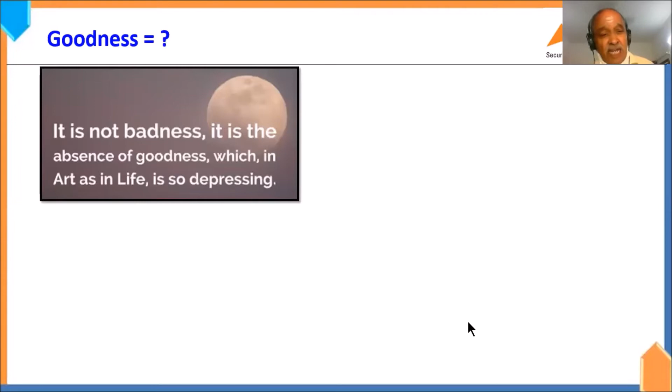Now, still we are on the topic of goodness. It is not badness, it is the absence of goodness, which in art as in life is so depressing. Now, we will define goodness in very simple terms as absence of badness, so that it is easy for us.

So health is, we said, physical health, mental health, emotional health, social health, environmental health, and spiritual health. So health, we can say as a parallel, absence of disease or illness. It's a very simple definition to follow this capsule.

Now, we say spotlessly clean. So spot is a negative thing. So the white shirt that he is wearing is spotlessly clean. So the opposite is used to describe the goodness of the shirt. A good person is a faultless person, we say. So absence of fault makes a person good.

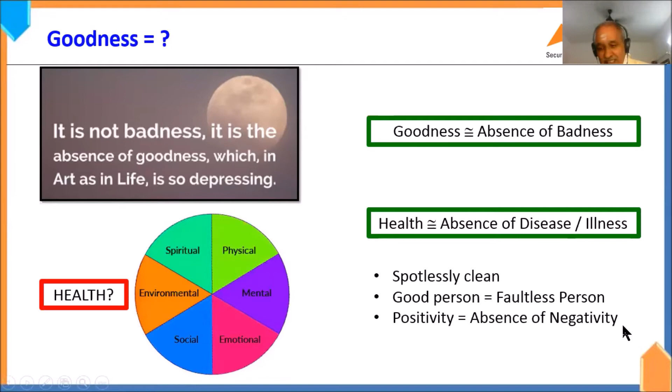Positivity means absence of negativity. If this is clear, we can proceed further now. What exactly is reliability in very simple terms?

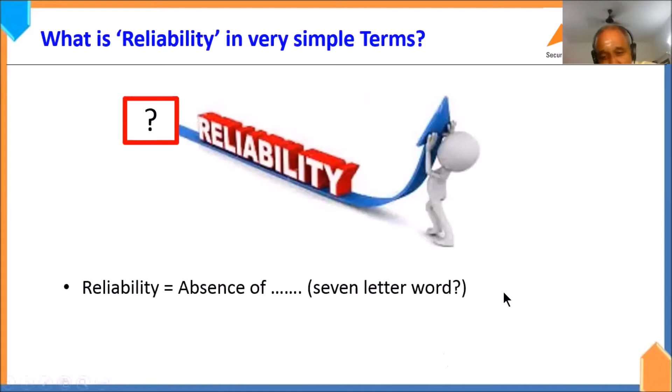Reliability to be defined. Reliability is absence of a 7-letter word. Because of so many analogies that we have seen so far, if it is in a class, I would ask for the answer, but now I cannot ask, so I'll answer myself. Absence of failure. So reliability is nothing but absence of failure. A product which does not fail is a reliable product. As simple as that. Now, but what is failure itself will have to be defined.

Now, the pyramid of reliability engineering - in any structure, we can never see the foundation. Foundation is unseen. Only the superstructure will be able to see. This is a pyramid of reliability engineering. And what you see, enormous building is all supported by the foundation, which is hidden. Always the part which is doing the most of the job will be hidden.

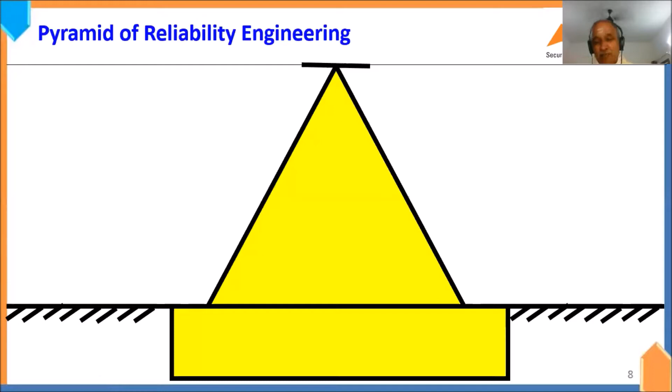Like in a hotel, we always tip the server, but the person who has prepared the meal probably is to be tipped, but we don't do that. So we have to have a strong foundation which is hidden.

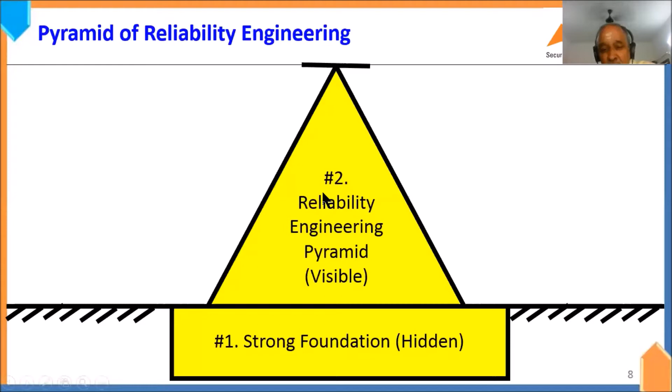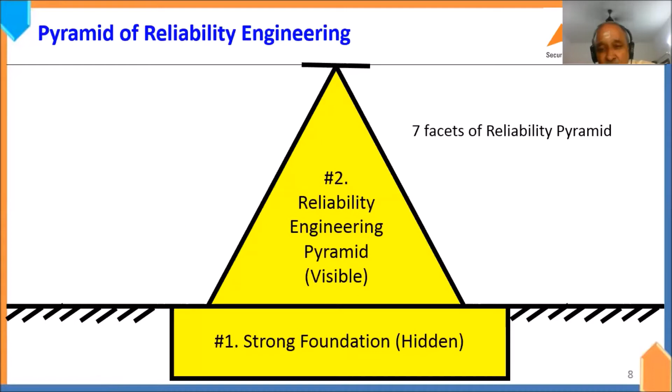Then the reliability engineering pyramid is visible. Normally the pyramid that we see on photographs and videos, they have got 4 facets, 4 sides, but this reliability pyramid has got 7 sides.

Now, first let us look at the foundation. The foundation must be strong. So we have laws of physics supporting the entire pyramid, and logistics, then multiple engineering disciplines - all kinds of engineering, mechanical, civil, electrical, electronics, everything, and mathematics, and maintenance planning, chemistry, and material science. These are the 7 elements of the foundation which is supporting the engineering pyramid.

Now, there is a 2-year MTech course in reliability engineering at IIT Kharagpur. There is a great demand for reliability engineers throughout the world.

Now, let us look at this - this is the top view of the pyramid. We are seeing from the top. So we can't see inside the foundation, we can just see the surface alone.

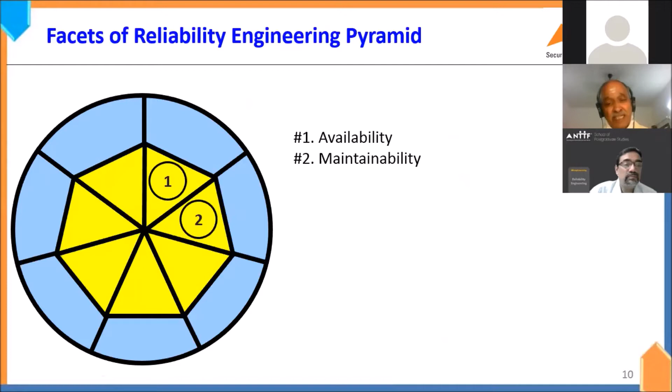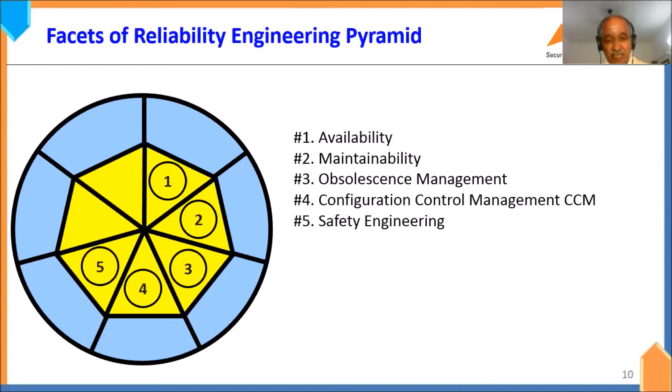Number 1 is availability - we will be defining such terms. What is availability? Number 2 is maintainability. Number 3 is obsolescence management - the product that we make should not become obsolete within a reasonable period of time. And configuration control management, and safety engineering, and support design and production engineers in developing these characteristics in the design and production stages.

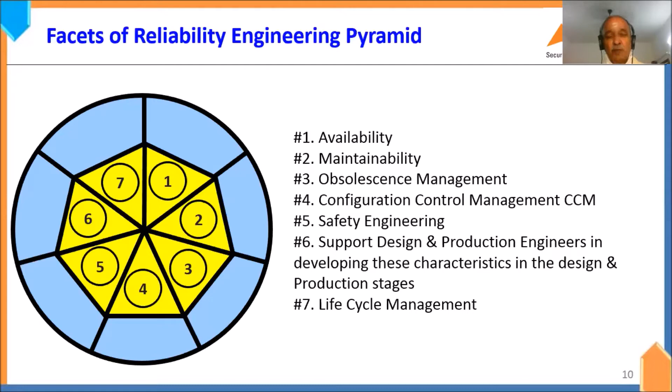7 is life cycle management. So this in short is the total ambit of what a reliability engineer is supposed to be doing in his career. Now how did the reliability engineer evolve? The early man, when he came on the earth, he needed tools to kill animals to eat. So that was an important consideration since time immemorial.

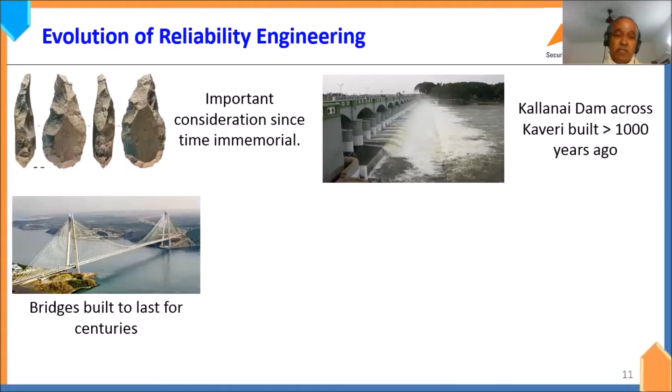The Kallanai Dam in Tamil Nadu was built more than 1,000 years ago. It is still functioning today. We are building bridges. They are expected to last for centuries.

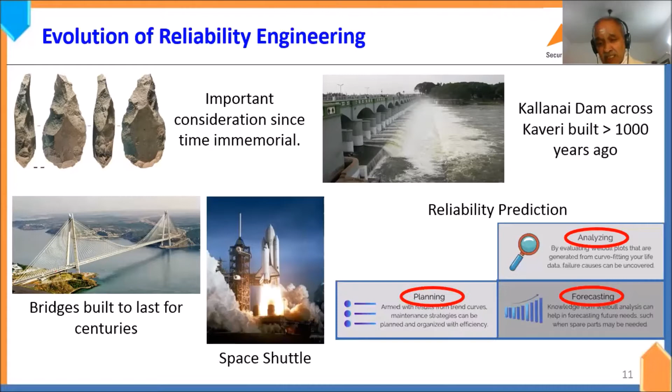And the space shuttle, reusable, and naturally reliability prediction is important. Reliability prediction consists of analyzing, forecasting, planning, and predicting reliability.

Now, you must have seen the Titanic film. The Titanic, the so-called unsinkable ship, sank on its maiden voyage from England to America. Why? It hit an iceberg. In engineering terms, this is called brittle fracture. The hull steel, the body of the ship, had high sulfur content, and when it met the load, the water was almost freezing, so it made the steel brittle. Also, the high impact load with velocity mattered. If it had stopped, it would not have collided and broken up. Even if it had touched the iceberg gently, nothing would have happened, but it collided with full force, and the damage split the hull into two.

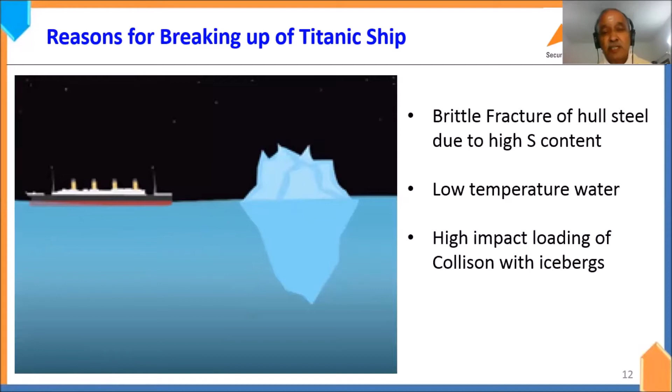Now let us differentiate between continuous and continual. 'It rained continuously last night' means it rained non-stop. 'It rained continually last night' means there was rain, but with let-ups, short breaks, and then rain again. We have to be very careful in using the most appropriate word. Maybe in 90% of cases it will be continual, because continuous improvement is extremely difficult, while continual improvement is possible. So reliability improvement has been continual for any products over the last centuries, never continuous.

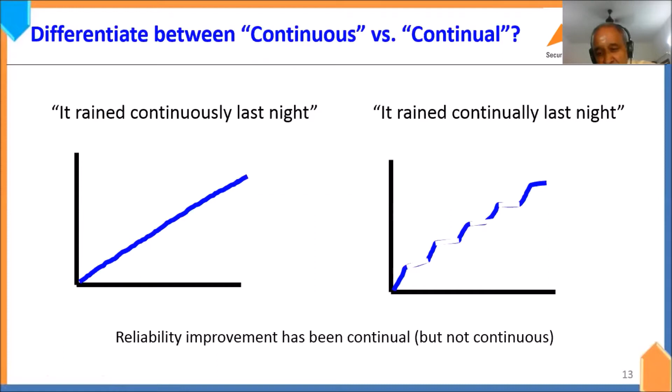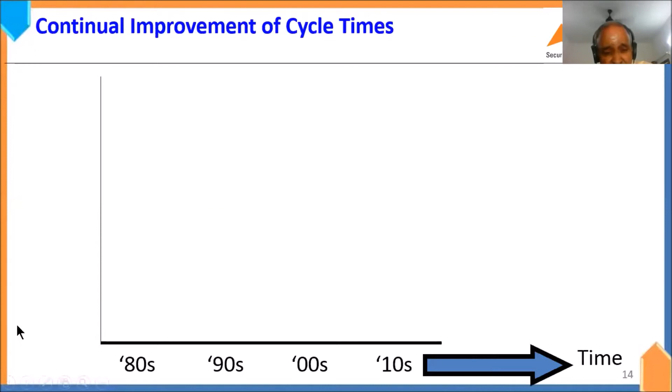Now, cycle times have been cut down very sharply over the years. In the 1980s and 90s compared to now, what was a month in the 80s became weeks, then days, and now it is hours.

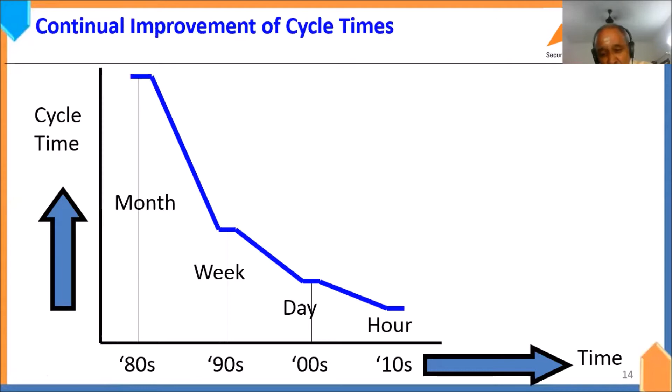Now I'll give you a small example. In 1967, I got the appointment order to work in Germany in the month of May, but I could go only in September because of so many things which had to be done. We had to plan so many things like this.

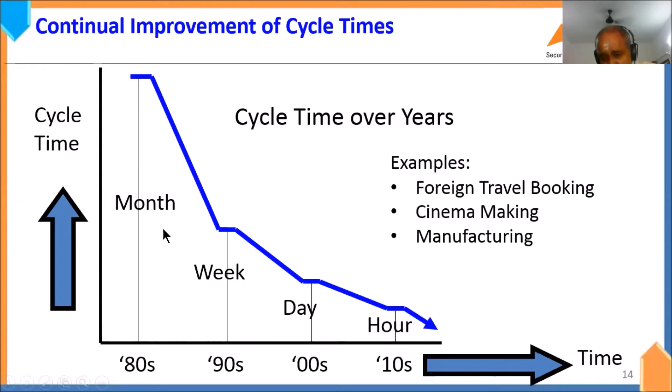Foreign travel, what took months, now takes probably a day or two. Cinema making, I remember when I was a kid, I'm 78 now, it used to take years, 2 years, 3 years like that, not at all uncommon, it was common. But nowadays they make even pictures within a week or a day. Similarly, manufacturing used to take a lot of days; now everything is calculated in minutes. A minute a car, a minute a bike.

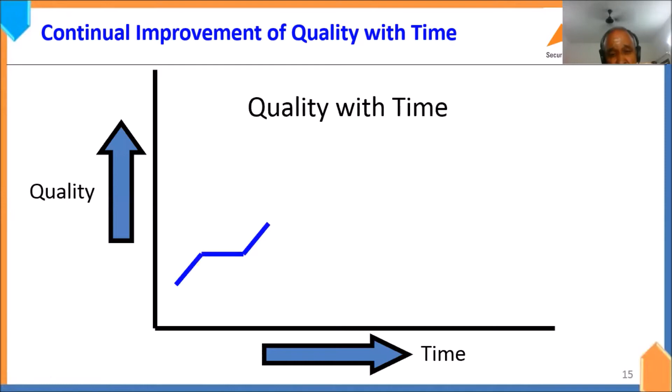The quality has seen continual improvement, not continuous, continual improvement, over time. See, the replacement of rings is a wear part in an engine. I remember in the 1960s we used to make a lot of jobs for India Pistons, the cylinder liners, for both indigenous use and export. The re-ringing of engines was necessary after 100,000 kilometers. But now it is 200,000, a 100% increase in the past 40 years.

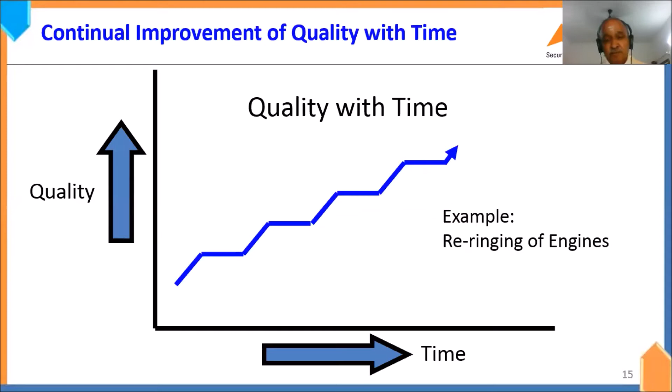Cost also has been continually dropping, I'm sorry, I should not say continuously, it has been dropping continually with time. Now, take a smartphone, you can see what it was 5 years back and what the same product, or a comparable product, is now.

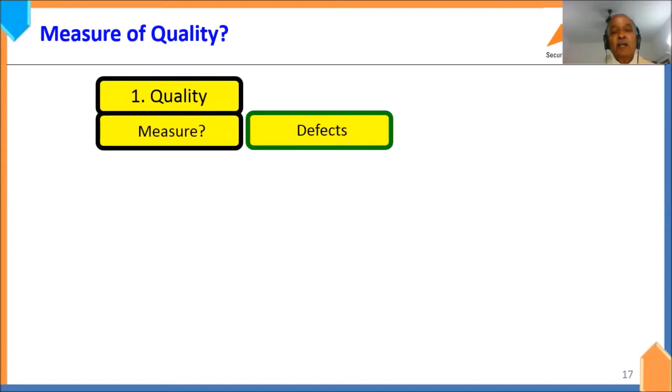Now, what about the measure of quality? In a class, I would ask for an answer, but now I'll give the answer myself. Quality is measured by its opposite, by its counter. The measure of quality is defects. Absence of defects means a high quality product. So the target for defects is zero defect, no defect should be the target.

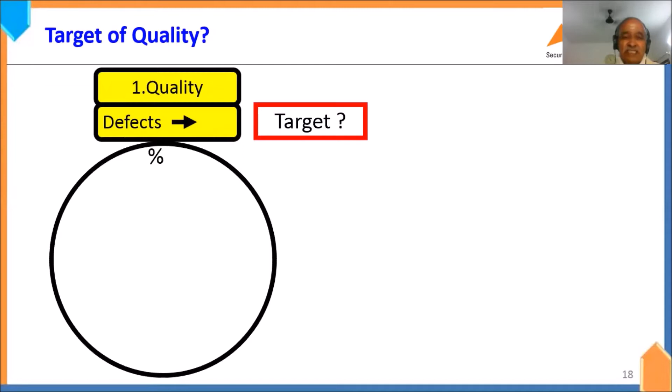Now what about the target of quality? Let us see defects, let's call it percentage defects. Now we'll call it ppm, parts per million. So the target actually is zero defect, ZD. So the measure of quality is defects, and the target of defects is equal to 0.

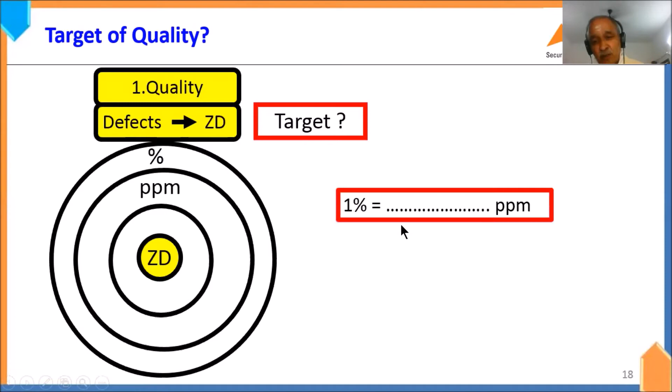Now, 1% is equal to how many ppm? The answer is 10,000. Let us see: 1% defects means 1 in 100, 10 in 1,000, 100 in 10,000, 1,000 in 1 lakh, and 10,000 in a million. This is how modern day quality control is done, we express our defects not in percentage but in ppm. That shows that we have continually improved.

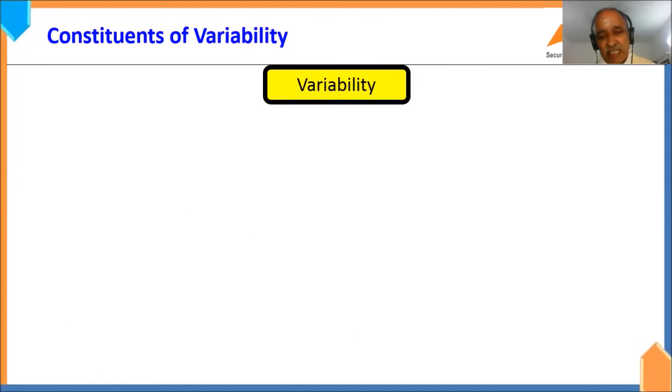What about variability? Let us say we have a part to be made 20 plus minus 0.1. Then we think 19.9 is okay, 20.1 is also okay. But if the variation is less, the better the quality. So variability is measured by one, precision, and another, accuracy. Precision itself is measured by what is known as CP, which stands for Process Capability Index.

The formula for that calculation is tolerance divided by process variation. Tolerance, I said 20 plus minus 0.1, so 0.2 is the tolerance, divided by actual variation. If the actual variation is 0.2, then CP is equal to 1. But if the actual variation were to be much less, 0.1, then CP is equal to 2. Better the number, greater the number than 1, the better is the quality.

So the formula is USL minus LSL, that is upper specification limit minus lower specification limit. The difference between the two is called tolerance, divided by 6 sigma. 6 sigma is the total process variation.

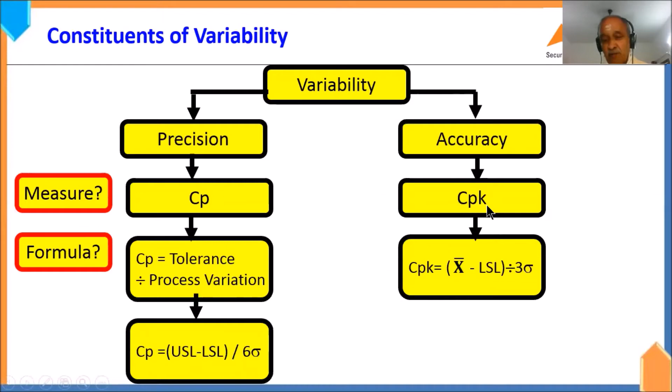What about accuracy? CPK, this is Process Performance Index. For that, the formula is X bar, which is the process mean. It may be 20 in this case, minus LSL 19.9, so 0.1, divided by 3 sigma. Here it was 6 sigma, here it is 3 sigma. Or it can be USL minus X bar, divided by 3 sigma, and whichever is smaller.

So here we got, there's only one formula. Here we got two formulas, out of which the number which is less we have to take. So far, variability is measured by both CP and CPK. This refers to precision, this refers mainly to accuracy.

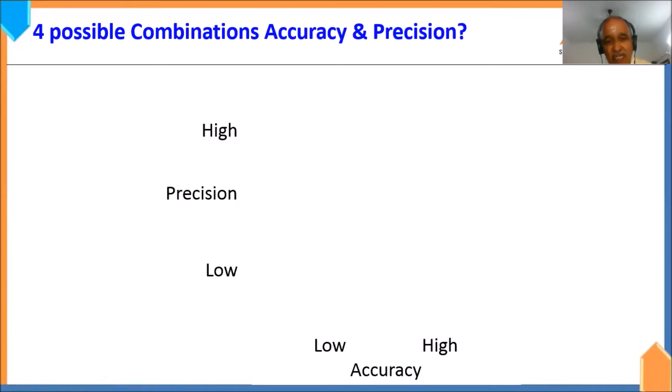Now with accuracy and precision, we have got four possible combinations. We have got low accuracy and high accuracy, and we have got low precision and high precision. So with the result, high accuracy and high precision will be one combination.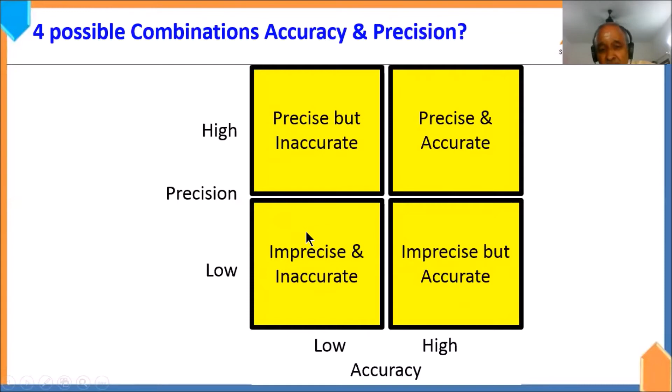And high accuracy and low precision will be another combination, imprecise but accurate. And low, both are low, low accuracy low precision. And then high precision but inaccurate, low accuracy is there. So we have got 4 combinations possible.

What is accurate need not be precise, and what is precise need not necessarily be accurate. That is the message of this slide.

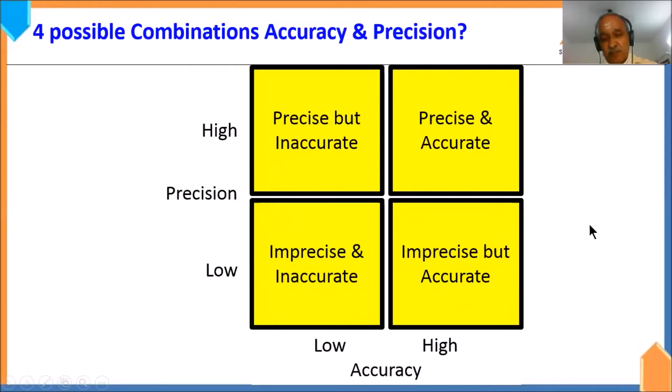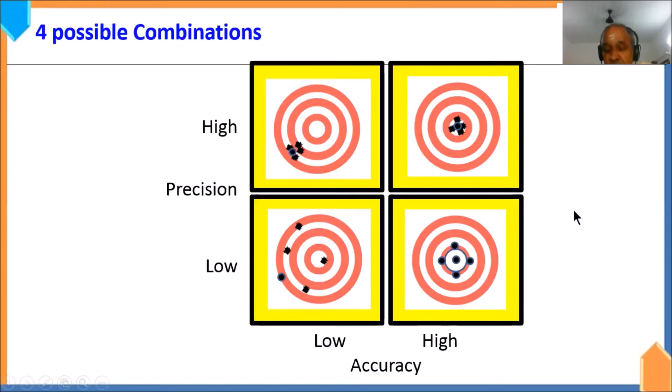Now in machine tools, let us say one is A - yeah, this is A, we are here. The ideal condition is this. This is quadrant 1, quadrant 2, quadrant 3, quadrant 4. Now B, we can move from here to here. We can move from here to there.

Now which is the easiest? Somebody will say C, somebody will say B, somebody will say A. But the correct answer is A. Reason: what is precise can be made accurate. But what is low in precision, low in accuracy, we can't improve, because precision is a matter of machine quality.

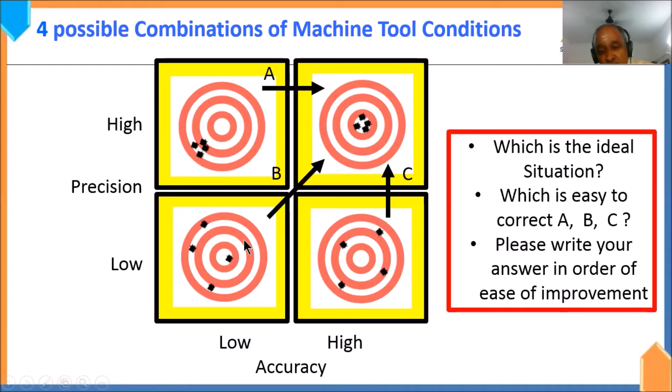Precision is built into the machine in terms of bearing, accuracy, turning, etc. Whereas adjustment is got by the machine setter. Precision is built in the machine. So basically a machine which is precise can be made accurate, but which is lacking in precision, you can't do anything about it. So the correct answer is A.

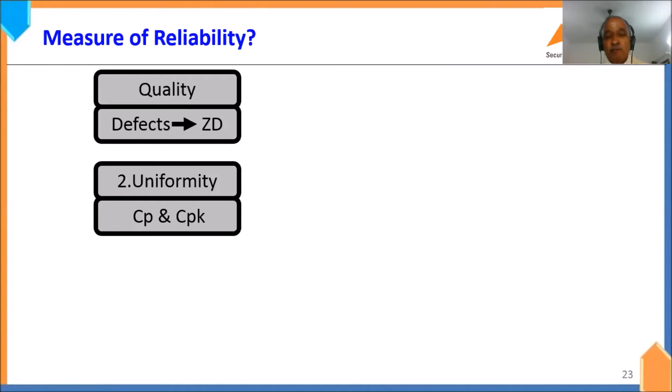Now, measure of reliability - how do we measure reliability? Let us look at quality. We already seen that it's measured by its opposite characteristics, namely defects, and uniformity we have seen through precision and accuracy, CP and CPK. Reliability is measured by defects and field failure. Here it is defect, here it is called field failure - you have sold it, but it has failed in the field, and so that is a reliability problem.

Now, what should be the target of reliability? The target of reliability again is ZF. There it was ZD, here ZF means zero field failure.

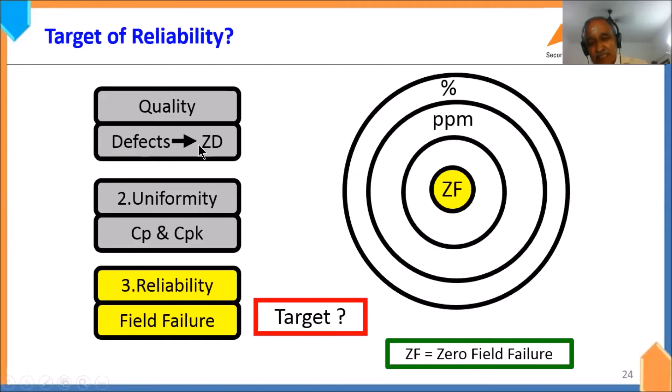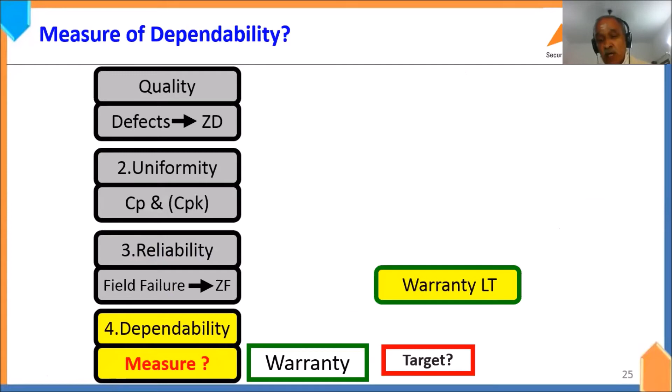You may exercise your mind as to what is LT. LT is equal to lifetime of the product, not lifetime of the owner, lifetime of the product.

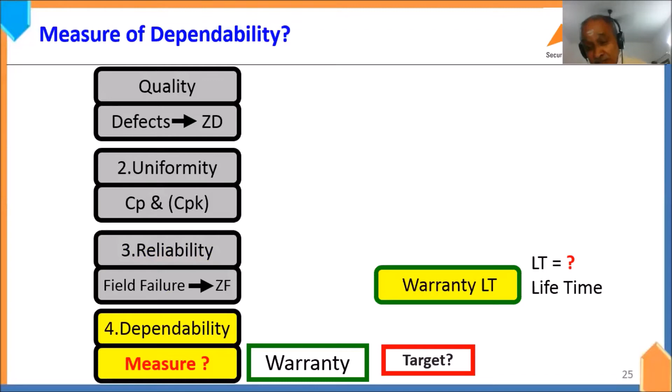Now I'll share a small example with Toyota. Toyota started exporting in a big way after the 1980s to America. Before that, the big three, meaning Ford Motors, General Motors, and Chrysler Corporation, ruled the roost of the American auto industry, and they gave a warranty of 12 by 12: 12 months and 12,000 miles, that is about 20,000 kilometers.

When Toyota started, they said 12 by U. 12 stands for 12 months, U means unlimited miles. So the moment Toyota entered the field, others got jittery, because the quality is determined by competition. If competition gives you unlimited kilometer mileage, then you also have to follow, so Americans also had to follow the Japanese practice.

So please remember, always, reliability is not what we engineers say as reliability. Reliability is what the customer says as reliability. Very, very important. Now what about diagnostics? There may be a defect, but the defect must be known to the user, to the consumer. So we saw all these things.

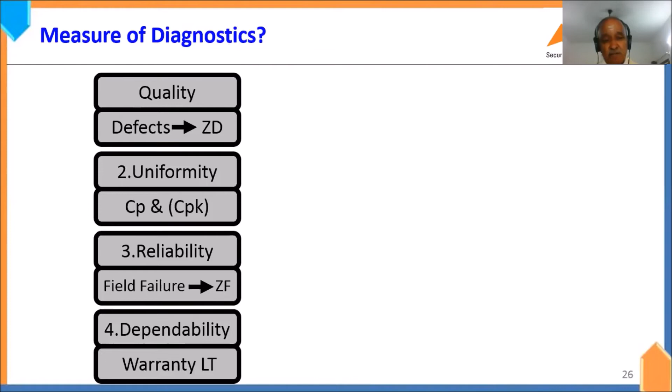Next is diagnostics. Measure is self-diagnostics; customer should be able to understand. I'll give a small example of Volkswagen Vento, which was given to me by NTTF 6 or 7 years back, I don't remember. It said there is no first service free, second service, third service, free service.

For the first 1 year, you don't have to do anything. At the end of 1 year, you go to the Volkswagen service station and get it serviced by paying. That is the sort of reliability they have built into the machine. It is so good, whereas some Indian manufacturers will say every 500 kilometers, 5,000 kilometers, 10,000 kilometers. Here, unlimited kilometers, and that is the kind of reliability built into the car.

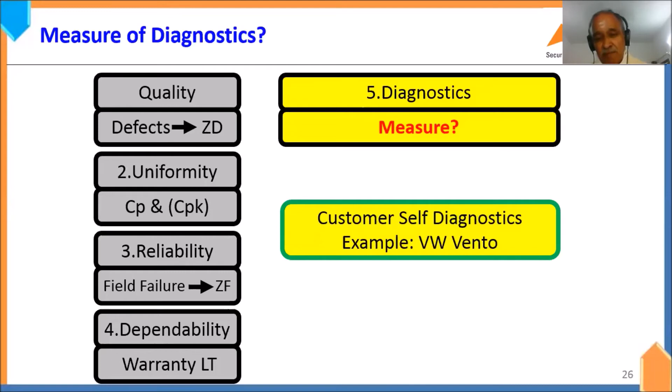And also nowadays with so much sensors, suppose the tail lamp is fused, in the BMW, on the control panel you will get a message: left tail lamp rear fused, like that. So here also in Volkswagen Vento, it shows when you have to go for service. It will tell you depending on the time and also the hours or kilometers of usage.

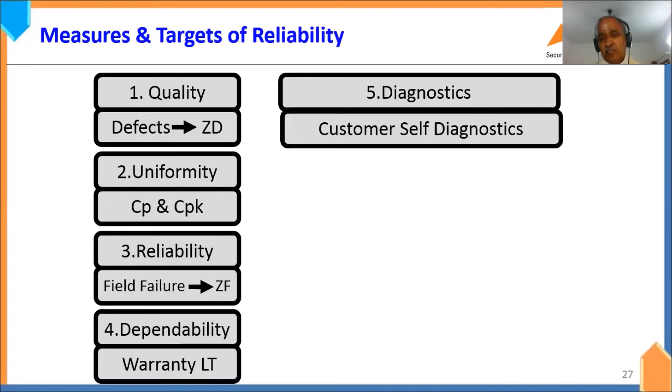That is diagnostics. Now, we saw customer self-diagnostics. Next, we have seen quality, uniformity, reliability, dependability, and all of these put together, what may be the name you think? Normally in class I'd ask you for this, and this is called availability.

See, all of you are computer users. Availability means it is measured by uptime. We don't want the computer to fail anytime at all. So the measure is uptime. What is the target for uptime? 100%. Whenever you open the laptop, it should work, that's all. That is the expectation of the customer.

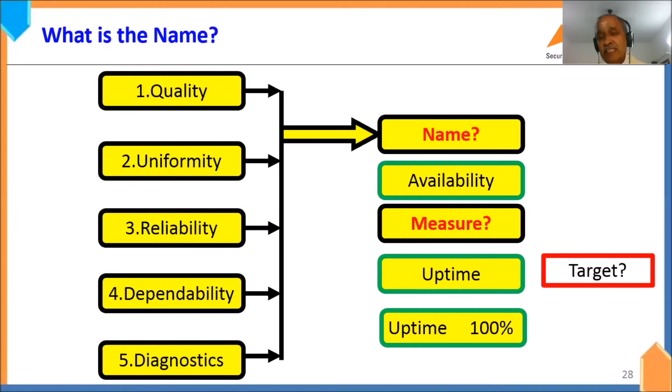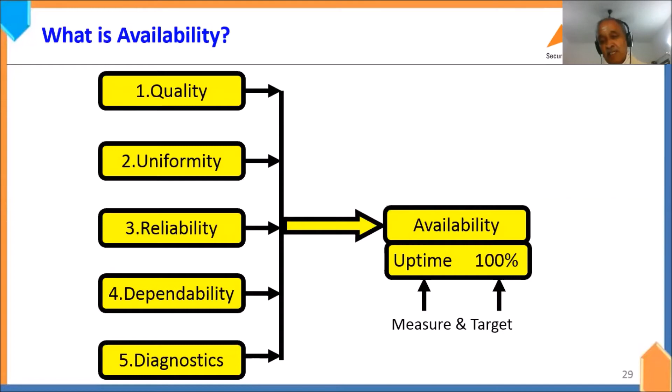Now, what is availability? Uptime 100%, and target uptime is the measure, target is 100%. That is what differentiates between the two: one is the measure, another is the target.

Now what about technical performance? The measure of technical performance is state-of-the-art technology. Suppose you have a computer which has got 8 GB RAM, and somebody is coming up with 16, so that is the state-of-the-art. But we want to also follow the state-of-the-art technology; we want to have the latest technology in our hand.

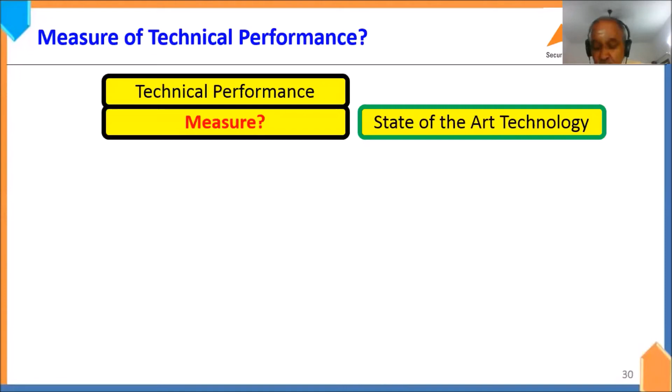Now what about ergonomics? The measure of ergonomics is styling, ease of operation, color, user friendliness. It should be intuitive to use. Core features must be as expected by customers; that's the measure of core features.

Now what about delight features? The measure is unexpected features that delight customers, that thrill customers. All these things go to affect our reliability.

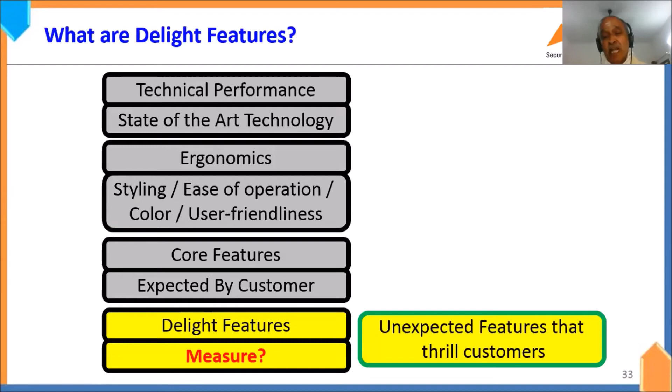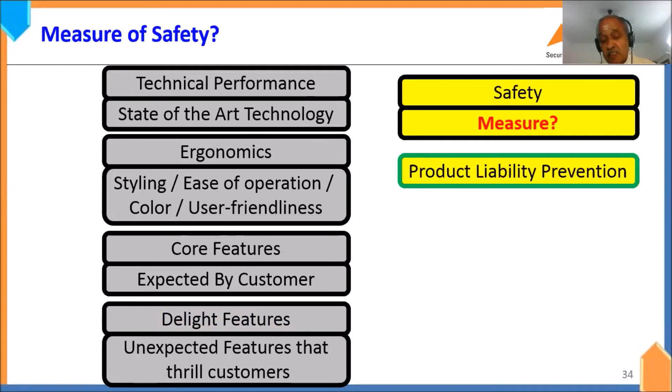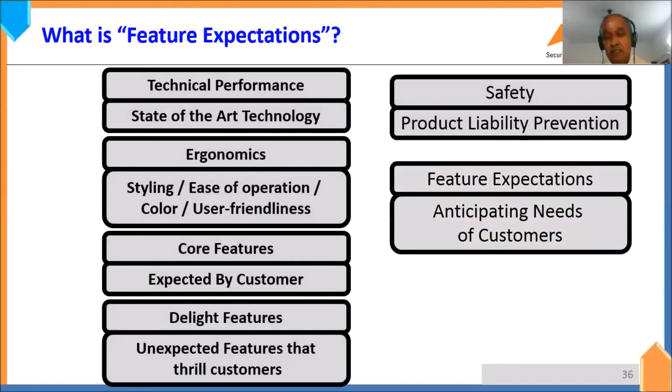Feature expectation measures anticipating needs of customers. That's a very important thing for all product designers to do, what the real customers need, because he may be able to express it, he may not be able to express it also many times. Now, we saw technical performance, ergonomics, core features, delight features, safety, feature expectation. The combined term is operational effectiveness.

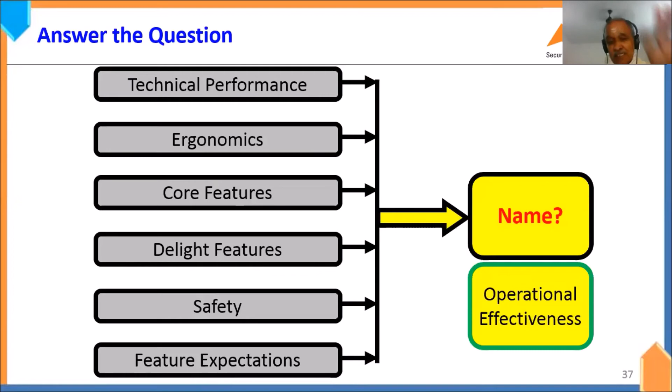Operational effectiveness means these are the terms used in reliability engineering, all put together under that name. Now, why do Japanese products succeed in a big way? That is because the quality is continually increasing, improving.

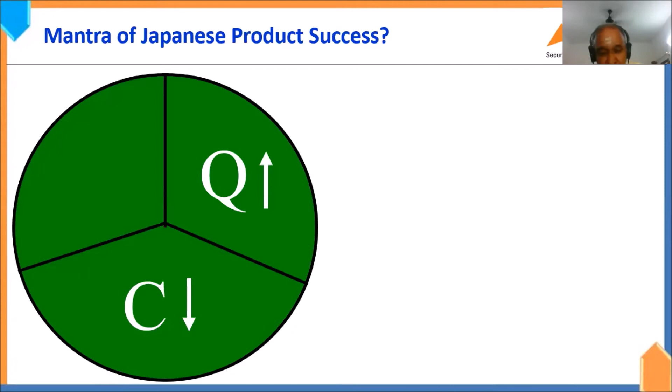Life cycle, C means cost, life cycle cost, that is ownership, cost of ownership. It is not the cost that you pay to buy the product. Let us say you buy a car for 10 lakhs rupees, and use it for 10 years. In that time, you spend another 10 lakhs towards petrol, oil, maintenance, spare parts, servicing, insurance, etc. So the total life cycle cost of ownership is coming down continually.

And delivery, the delivery must be improved. The quality ever improving, life cycle cost ever decreasing, delivery ever improving. Delivery means, supposing you order the car and he says next week Thursday you come and take it, sir, at 4 o'clock, then at 3 o'clock it should be ready on that day. You should not wring your hands and say, sorry sir, it does not come tomorrow. That is not delivery. That is one aspect, a very important aspect, but not the only thing.

Throughout its product life cycle, we must support the product. That is called delivery. Delivery means the product as new, delivered without any defects, and service after sales and cycle time for processing. You must execute the order as per your own stipulations, what you are committed to do, and sustained contact and interest after sales. Many sellers do not worry about the customer after the sale has taken place. They forget. That is not delivery.

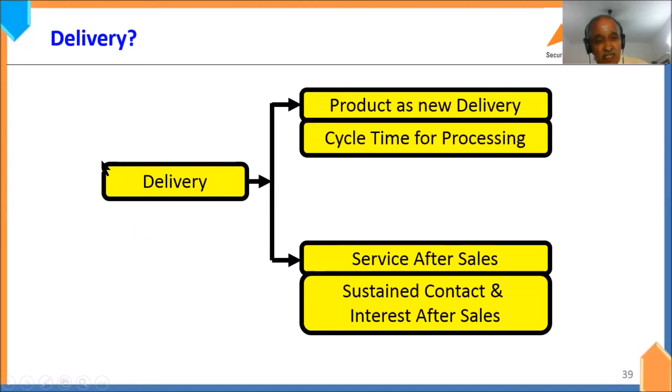So the success of Suzuki in India is not just due to its product quality alone, but service support. Even in the Himalayas, they have got a service station now. That is very important.

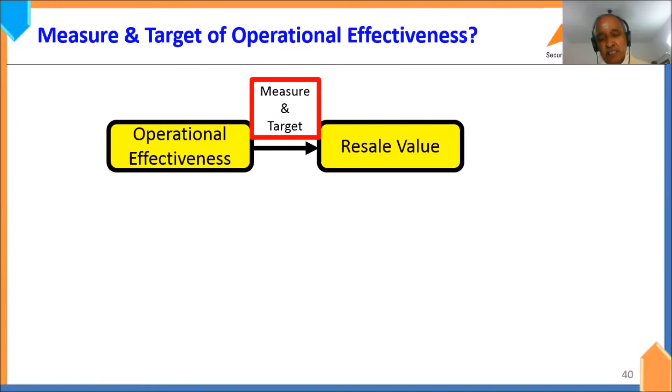Now, what about operational effectiveness, measure and target? Measure of resale value of their product. That is a measure, of course it's very difficult. Suppose you bought a car yesterday, today you want to sell it, you will get 30% less. That is because of availability. So a high percentage of purchase price should be the resale value.

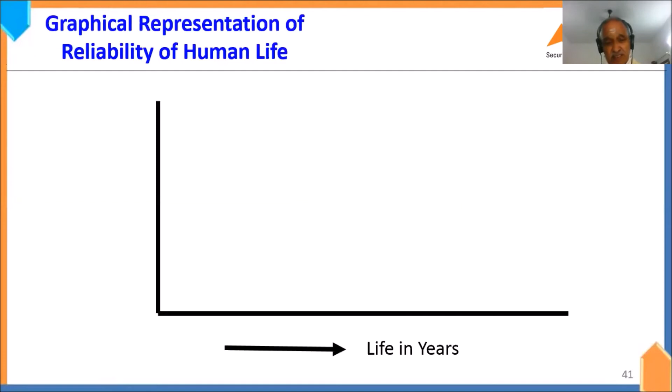Now what about graphical representation of human life? Let us see reliability of human life. Horizontal axis is number of years, life in years. The vertical axis is failure rate. Failure means death. Now let us say after 5 years, let us say after 80 years. In the first 5 years, this is death at the time of birth itself, and as a child, this decreasing failure rate up to 5. Afterwards, A to B is reducing failure rate.

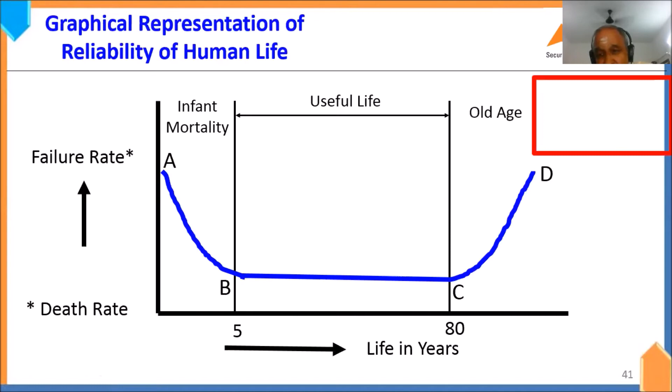And then we get a constant failure rate. This is useful life, B to C. C to D is old age. What does the shape of the curve remind us of? It is looking like a bathtub. So this is called a bathtub curve.

Bathtub curve is the reliability curve of any product. This is before dispatching to the customer. As a car is made, it is tested for any defects and then rectified before it is delivered to the customer. Somewhere in the middle is the warranty period, then the useful life, and afterwards old age will set in.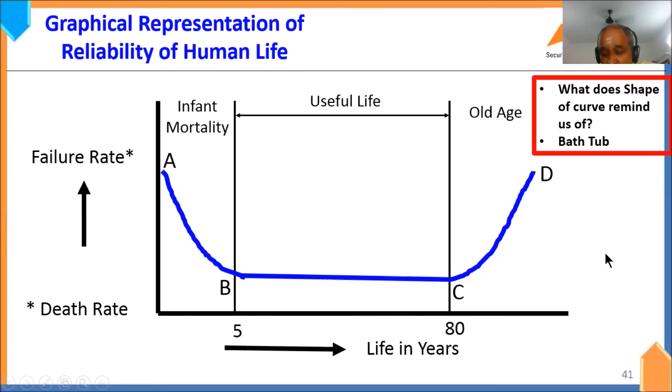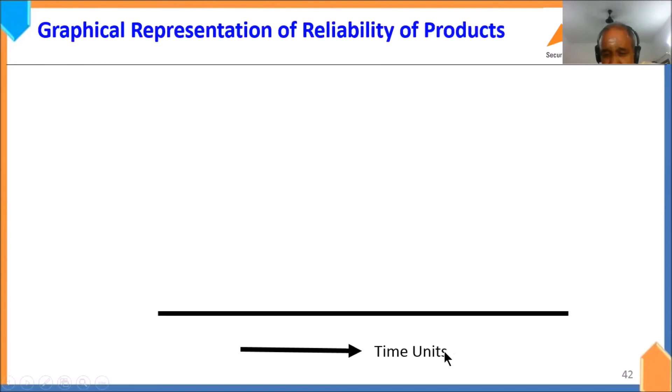Now let us see the same thing, bathtub curve for a product. Time units may be hours, days, weeks, months, years, or decades. Failure rate, A to B, infant mortality, is called the burn-in period, especially for electronics or even engine testing. We test for its performance before dispatching to the customer. This is within the factory, the first portion.

And then we get useful life, B to C. Then C to D is wear out. This is constant failure rate, this is increasing failure rate, this is decreasing failure rate. Now the warranty period will be somewhere in there, and beyond warranty it should have good performance. As a reliability engineer, we must also track what is happening in the post-warranty period so that we can improve the product and shift this curve, increasing the length of the bathtub.

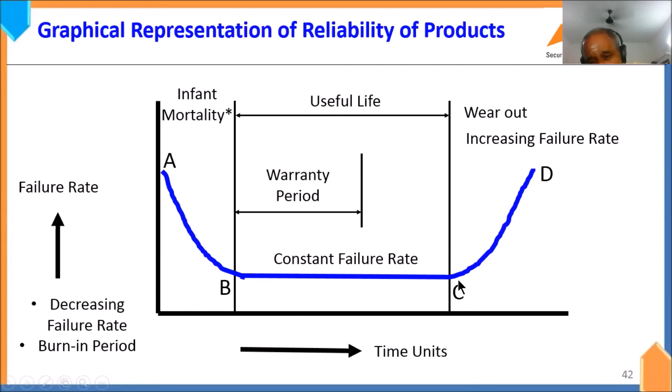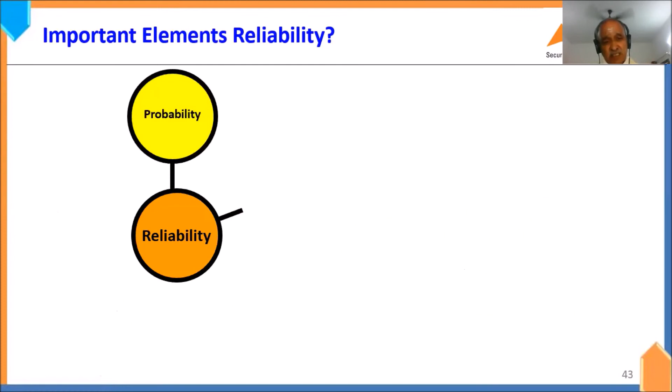Now, what are the important elements of reliability? Reliability - we must know something about probability, durability (that is life of the product), dependability, and quality over time. Quality means quality as new; reliability means quality over time. And availability - uptime versus total time.

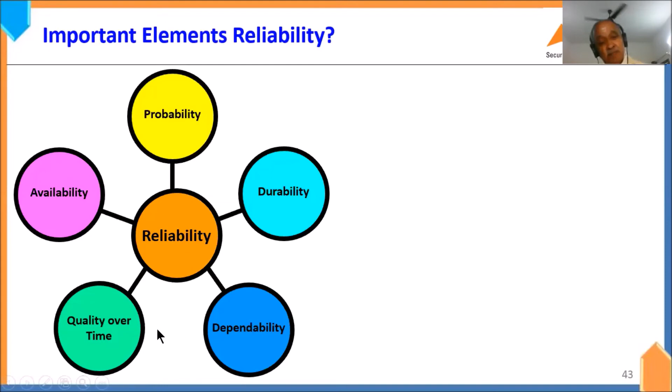Reliability is defined as the probability that a product, system, or service will perform its intended function adequately for a specified period of time, and will operate in a defined environment without failure. If you buy a car, they will say the warranty ceases if you use it for racing, because that is not meant for use on a racetrack - a separate engine will be required.

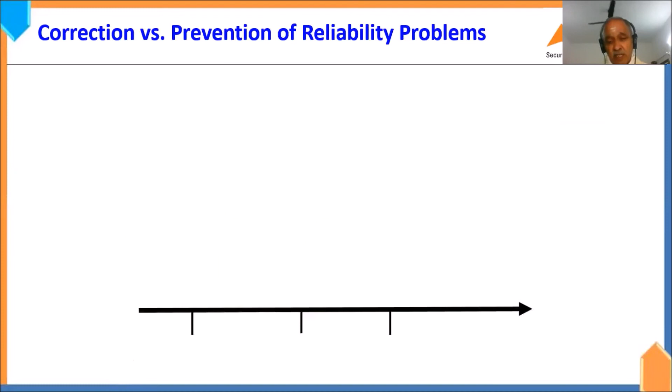Now, what about correction of reliability problem versus prevention of reliability problem? We have the x-axis where a new product is being developed: we have the concept, then we design and develop the product, then we build and test, and then we operate and support. The vertical axis is cost in dollars.

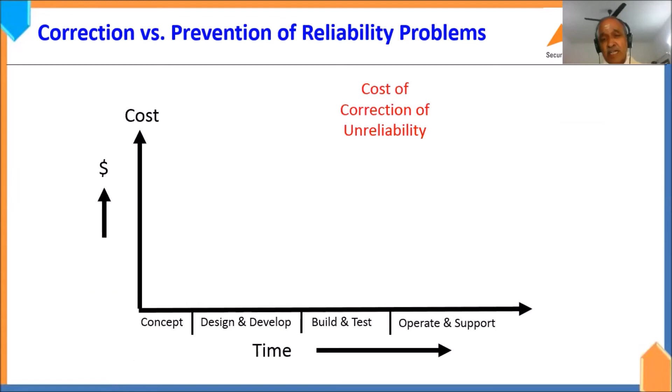The cost of correction of unreliability - we have delivered the product, the customer says it's defective, we spend our time, money, and effort to correct the product and restore it back to him. But this costs a hell of a lot. Whereas if we can do the testing within ourselves during the concept, design, develop, and build stages, the total cost of prevention of unreliability is much less.

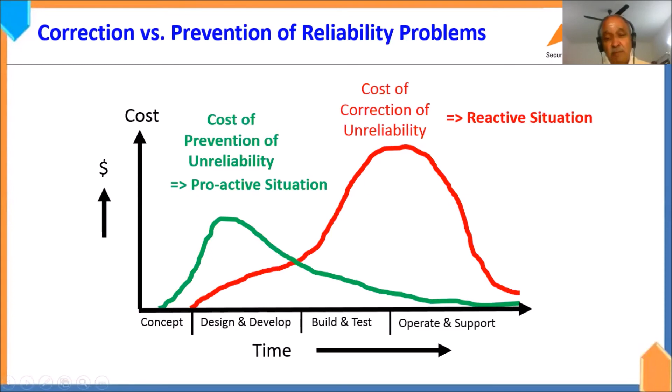This is called the reactive situation, and this is called the proactive situation. So proactivity is much better than reactivity, in terms of both cost and the image of the company producing this.

Now, what is the difference between quality and reliability? Does a reliable design automatically mean a reliable product? In a class I had asked for an answer; now I'll answer myself. Reliable design is necessary but not sufficient for a reliable product. Why? The second condition is reliable manufacturing. Even if the best design is given, if the manufacturing is not reliable, then we can't get the reliable product.

We need reliable service support to achieve a reliable product. If service stations were not there in all nooks and corners of India, Suzuki would not have achieved such a great, prominent position as a major manufacturer of cars in India. So reliable design supported by reliable manufacturing, both supported by reliable service, gives rise to a reliable product. Conclusion: reliable design plus reliable manufacturing gives you reliable quality; reliable quality plus reliable service support in the field will realize the reliable product.

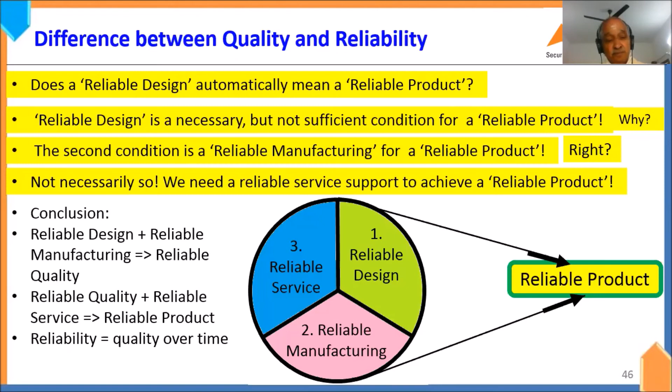So, reliability means quality over time.

Now, a brief introduction - I take this opportunity to introduce to all of you the School of Postgraduate Studies, where you can study product design, tool engineering, tool design, or quality, and in any of these four streams you can become a reliability engineer, for which there is worldwide demand.

On the left-hand top you see a 5-storied building, the tallest structure in our Peenya campus. We have postgraduate programs: a 2-year postgraduate degree program in tool engineering, started in 1983. So far, 560 graduates have come out successfully and are placed in industries both in India and abroad.

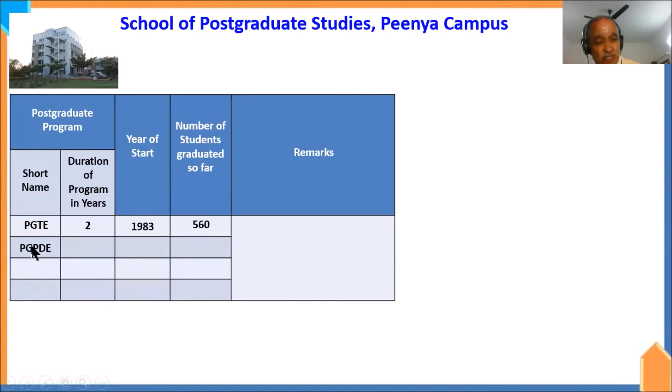Then we started another 2-year postgraduate degree program in product design and engineering in 1998, and so far 272 BE graduates have post-graduated from this school. We also started a postgraduate diploma in tool design, a 1-year program, started in 2002, with 606 graduates. Then a postgraduate diploma in quality engineering and management, a 1-year program started in 2005, with 154 graduates.

All NTTF programs are recognized by industry from day one, evidenced by campus placement of all eligible students, including: Ashok Leyland, Autoliv, Bajaj, Brakes India, Caresoft, Caterpillar, CN Technologies Hyderabad, Delphi, Fiat, General Motors, Harita, Kangaroo, HCL, John Deere, LGB, L&T, Schneider, Subros, TE Connectivity, Turbo Engineers, TVS Motors, Sundaram Clayton, Whirlpool, and 450 other organizations which are tool rooms and tooling industries. They belong to an association called Tool and Gauge Manufacturers of India, founded by NTTF, called TAGMA. All these organizations are in touch with our school, and the moment any vacancy is there, they contact the school and take the appropriate person. So you can secure your future through NTTF PG school.

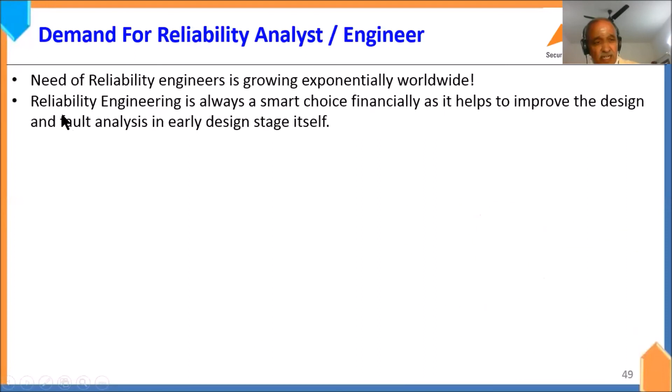Reliability engineering is always a smart choice financially, as it helps to improve the design and fault analysis in the early design stage. We have seen this. It is always beneficial for the organization to improve the design at the early stage rather than improving it post-manufacturing or mass production. We wish you all a very great future.

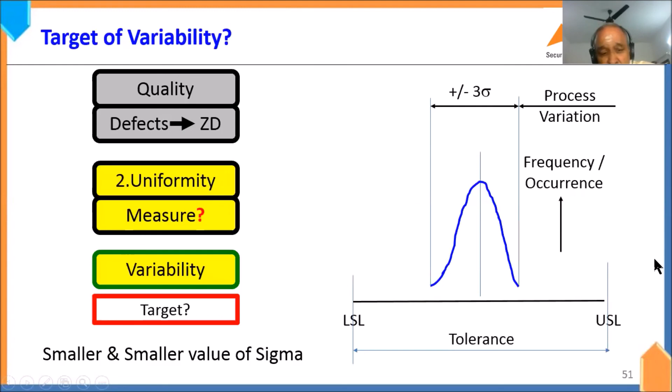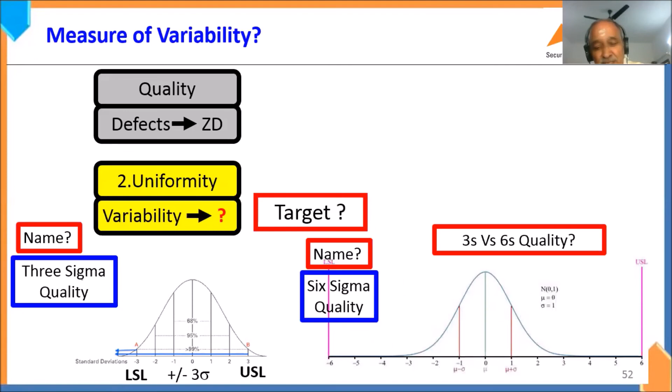As I said, quality is measured by the absence of defects. So defects when new, we know, whereas in use, we expect the same quality to be preserved - that is reliability. Now, we can define both quality and reliability in engineering terms, but what the customer says, that is true, we have to take it at face value. So sometimes quality and reliability will be interchanged. That is why we say reliability is quality over time.